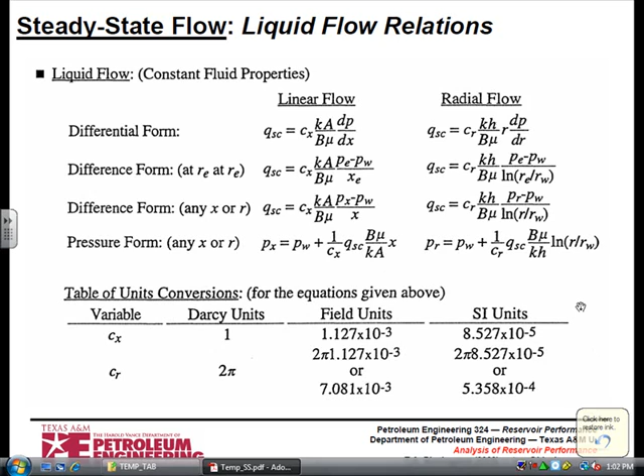All right, so today what we're going to do is talk about linear flow. And in this case, I've drawn this diagram such that if I'm a molecule, I'm going to move from higher pressure to lower pressure, and I'm going to move through this system because there's a lower pressure here. There's a pressure at the well, and there's a pressure at the outer side like that, and we're going to move across. This is exactly what you did in PETE 311.

Somebody tell me if it's possible to achieve this in reality other than in the lab. No. Can you make a reservoir simulator do this? It's going to be pretty tough. Why? Why is a reservoir simulator not going to want to produce steady state flow? Nope. I guarantee if I ask Dilhan, he'll give me a $5 answer, and every word of it will be correct. But it boils down to one word. What is that word, Dilhan? Mass accumulation. A simulator operates.

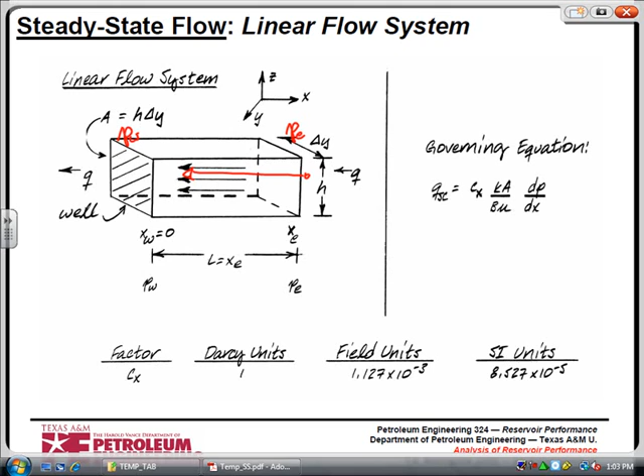It's Turkish, okay? Sorry about that.

Is it mass accumulation? Compressibility. That's what allows us to produce. Otherwise, we're going to have to fictitiously inject into this system. It cannot produce like this naturally. It has to produce like this under some sort of induced condition, right? And if there's any compressibility in the system at all, this condition will not be met, right? There will be a time-dependent term.

What's the hardest thing for a reservoir simulator to do, Mr. Little? It's like little boys. It cannot sit still. Mathematically, when you're running a reservoir simulator, if nothing's happening, it's going to make something happen. Out there in the round-off, little things are going to start happening. It's unstable. It's a numerical solution. And the same thing's going to be true with steady state. Forcing a reservoir to produce at steady state conditions is going to require you to impose a physically inconsistent condition on that reservoir. Again, I just want to make the point.

So now what we're going to do is very simply, as Mr. Zanero was trying to say, separate, right, Mr. Zanero? And integrate. So let's go to the next slide.

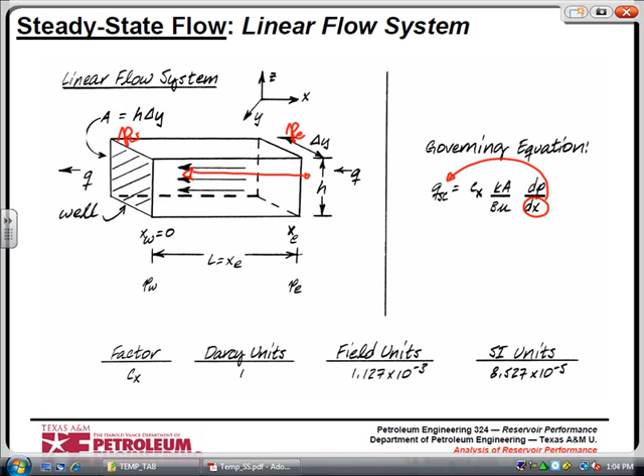And don't worry, Ms. Leva, I'll get these slides up today, just for you. I'm back on track. Every time I go off track, oh, and by the way, Ms. Leva wants 5 homework problems next week. So it is written, so it shall be done. Dilhan, I want you to be on me like, you know, I was going to say like a bad toupee, but thank you, you bunch of perverts. Okay. That is our goal next week, is get out all the homeworks that are due before exam 1. When's exam 1? March 6th. To quote Franklin Delano Roosevelt, a day which will live in infamy. Okay? Sorry? Technically, you're right. I'm glad you feel the bond. How's that? Shut up, man. Take your damn Ritalin, will you?

All right. So let's go back to Darcy's law. And we're now going to separate and integrate according to the Zanero process. Why did we do it this way, Mr. Zanero? The most important words in the first line is that B mu is equal to a constant. Otherwise, what happens? If they're not constant, they're a function of pressure. And then we got a problem. Okay? So now we've separated, and we're going to simply write our integrals. We can do this. We're going to integrate from 0 to x. We're going to integrate from pw to px.

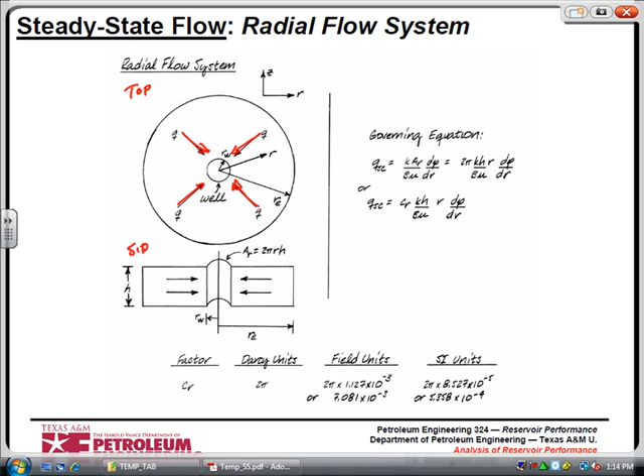Okay. Now let's move over to the next slide. And let's talk about the radial flow system. How many of you guys like my little radial flow picture here? So all flow is convergent into the well. And we're looking, this is the top, and this is the side. It's homogeneous. For whoever asked me that question, what does homogeneous mean? It means that the flow lines aren't doing this. They're actually just linear. Okay.

And this is the governing equation. Again, it's Darcy's law. And now we're going to solve the radial flow equation for the pressure distribution in this. How many of you know that this is what we've been doing for the last 80 years in well testing? Who started this?

Not me, thank you. Jerk. Anybody else?

Muskat came after this. No, Archie was a petrophysicist. Sorry? Fetkovich wasn't even a twinkle in his mom's eye by this time. Anybody else? I don't know who it was. Do you? It was the groundwater people. They were doing this in the early 1900s.

They derived relationships for radial flow. This is supposedly, what's it called, Dilhan? The Kelvin equation for heat flow. They were adapting it to fluid flow in porous media for the purpose of pump testing wells back in the teens and in the 20s. This is the so-called Theis solution whenever you go back and look at the transient.

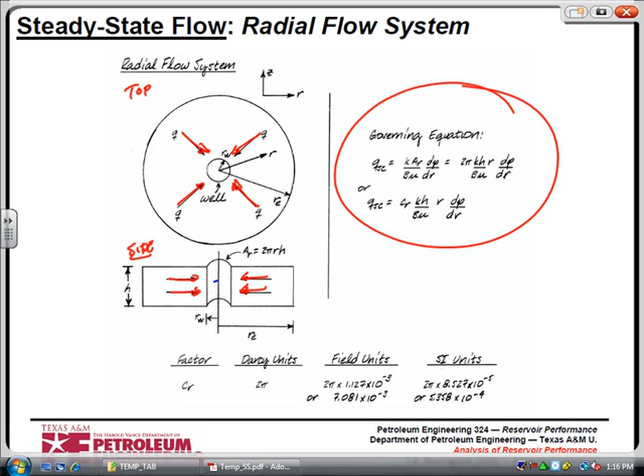But in this case, we're only considering a geometry that's uniform, it's homogeneous, there's no compressibility, there's no accumulation in the system. So let's see what we're going to solve. Exactly the same setup. I sort of corrected the notes on the fly. There's a CX term here, and CR is equal to CX times 2 pi. Of course, the 2 pi came from here. Okay, no problem. Now we're going to integrate this.

Marmina, what happens when you integrate 1 over x? But there's some steps in between. And if you were not to show those steps, the punishment would be severe, right? Dilhan, explain it to him. Yeah. It's the difference between 100 or a 0, right?

Okay. So this is PW and PR. So now we're going to integrate this. And what step did I leave out here, class? Oops, circled the wrong thing. The integral of 1 over x dx from 1 to x is equal to ln x, right? That's the definition.

What are you looking at me like? Is this news to you? You didn't say all this other stuff. You didn't tell me the limits, which is sort of the story of your life. You don't know your limits, okay?

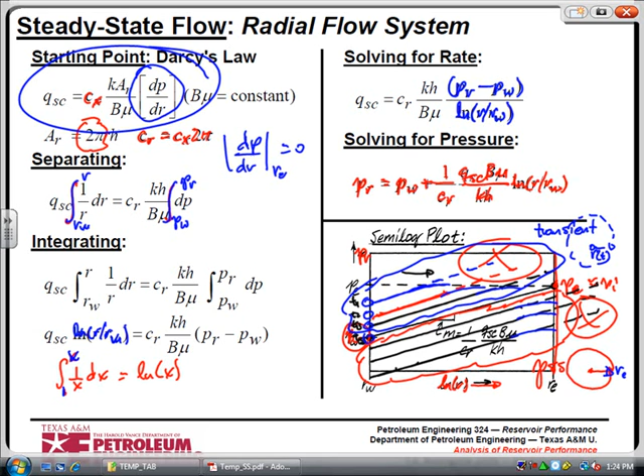Okay. Now, Dilhan wants to go over this real quick. It's almost time to call it a day.

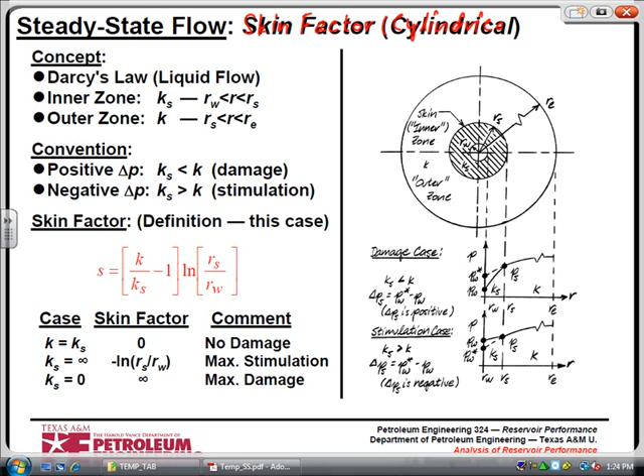Marmina, what's this called? The skin factor. This is for a cylinder. What does that mean, class? It means that this part of the donut is one permeability, and this part, well, actually, there's two donuts, one on the outside, one on the inside. The one on the outside is chocolate. The one on the inside is glazed. Does that make sense? Okay.

But what's the purpose of this discussion? You guys are starting to talk on me. Tell me what's going on.

The Pw star is the ideal pressure that this system should have. This is that equation we just derived. If the well is damaged, then the pressure will be lower than it's supposed to be. This is delta P skin. If the well is stimulated, the pressure will be higher than it's supposed to be. This is delta P skin. The reference is that it's P star minus something. So for damage, it is positive. For stimulation, it is negative. So when you hear a negative skin, that means the well's been stimulated.

Now, how do we go about deriving the formulation for this particular case? Let me put it another way. For Monday, you might want to know how to do this. Is that a good way of putting it, Dilhan? You might want to know how to formulate a pressure distribution inside of a two-zone reservoir. Where is the solution to that found? In the notes. But we might be kind of sneaky, and we might change the problem a little bit. Is that right, Dilhan? Just a little bit. Not too much. So your exercise problem on Monday will involve the skin factor.